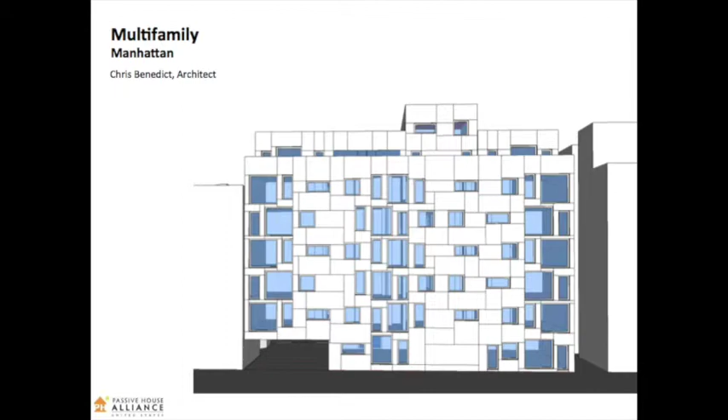At the Passive House Conference 2 years ago in Pittsburgh, Larry Swanson, who's the director of Action Housing, got up and said, it doesn't make sense for us not to do passive house because we have to hold the building for 15 years after we build it. And when we asked our architect to look at the math and figure out the effect of passive house savings versus built to code, we were about $1.5 million ahead on this one particular building, so it was crazy not to. And so Action Housing has been pushing for it.

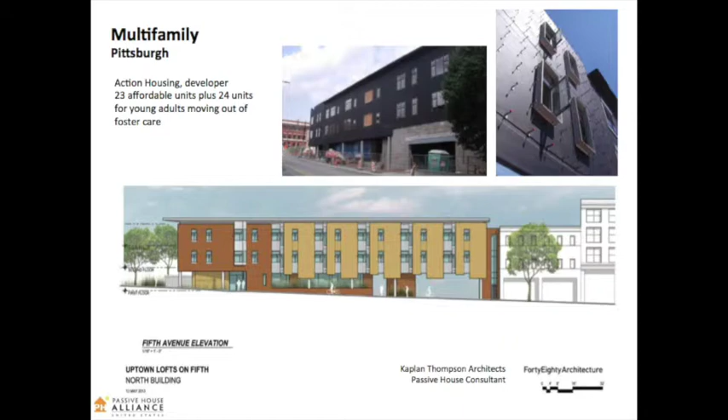And then as an architect doing this stuff, you look at these sort of things where you can imagine steel going up into the building and think, oh my God, there's just going to be thermal bridging to no end. They had these washers that you usually use, I think, for mounting mechanical equipment, resilient washers to use as thermal breaks. So anyway, all this stuff gets modeled. It's impressive.

Onion Flats in Philadelphia. These guys are amazing. Tim McDonald and a couple of his brothers started a company a while ago. They did design build, and then they bought a modular factory, and they make their own modules. They're also passive house consultants. They're just like one big thing, and they're doing more and more developments, multifamily.

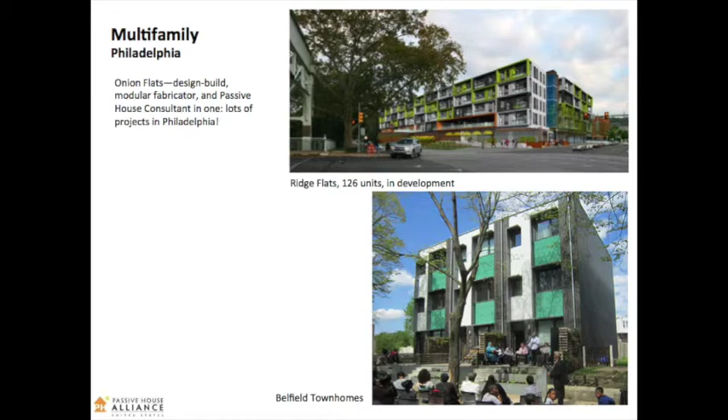We're seeing some townhouse units here, the Belfield townhomes that were completed a couple years ago as passive houses. This is Ridge Flats, 126 units in Philadelphia. Last week, Tim told me that they're working on getting the contract in line. So this hopefully will be underway here soon. It's a really impressive project. All their projects are, and it's just amazing the amount of work they're doing. I want to go to Philadelphia and take a little tour.

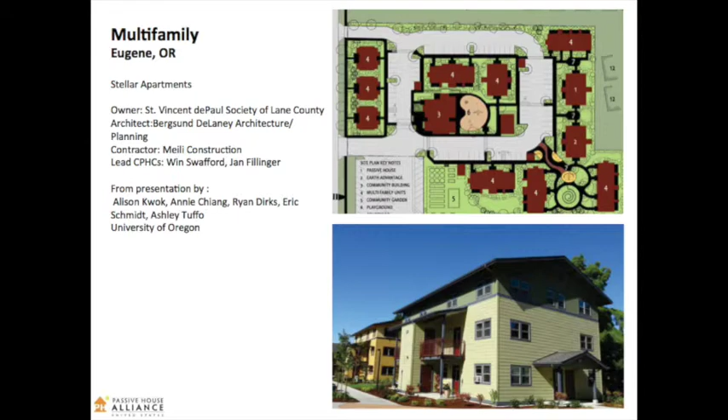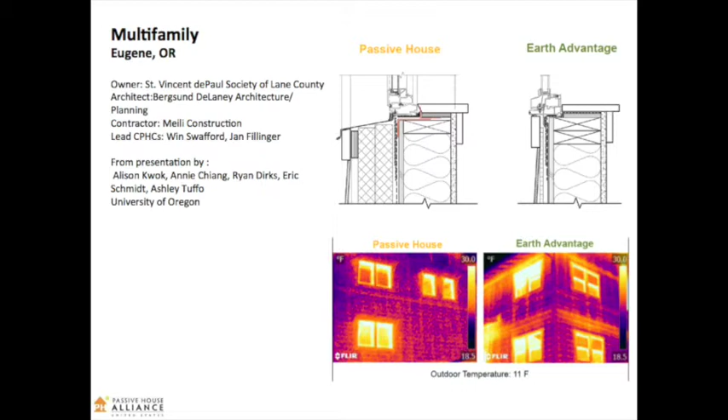So the point, though, it's interesting in this detail. You see with the rigid here, you're not only getting more insulation and continuous insulation, because the siding can be put on via furring strips, which are screwed to the studs, so you don't have to have anything solid where the siding is. You're also seeing a really distinct air tightness transition there to the windows. So these are the things that you just start to plug in and think about as you go to this next level of thermal rigor.

So what did they get? Well, the Earth Advantage was pretty good, but passive house is about 36% better in overall energy use. And when you look at the big blue pie changing from 41% down to 17%, that's heating. So that's the story with passive house everywhere. And the reason that happens is because we know that in cold climates, it's usually about 50% of our energy load. So that's the first big thing to take a crack at.

Interestingly, though, water heating is usually second, and here it turns out to be the case. So here we are at 22% on each of those. So that didn't change. Plug loads are relatively similar. That's people using TVs and blenders and whatever. And I think there's probably an ERV in here. Yeah. So you're wondering how much does it cost to run that ERV all year long? Well, it's 4% of your overall energy use. So you have ECM motors that are efficient, and it's not a huge drain.

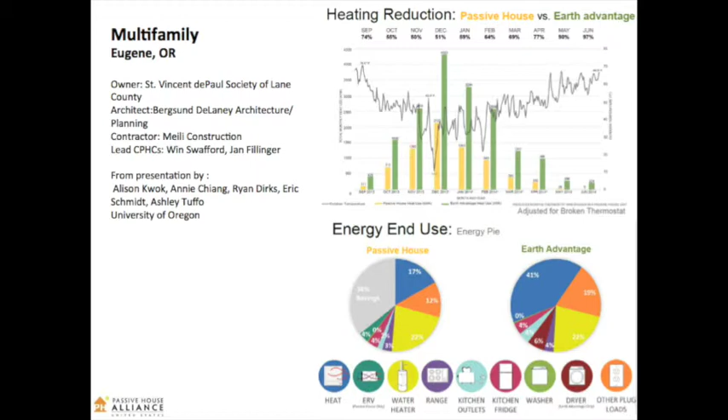And then you can see kind of as the temperature moves throughout the day or throughout the year, you're getting your big energy savings, yellow being passive house using less. So nice effective comparison there.

Well, you can do interior, you can do exterior. Interior is often problematic because you have walls coming in and hitting the exterior, so you've got thermal bridging there. And you have space constraints. I mean, the rooms are usually, in this era especially, not oversized, let's say. So an exterior retrofit, in this case, since you're going to have some moisture load building up on the inside, they decided to go with the vapor open enclosure.

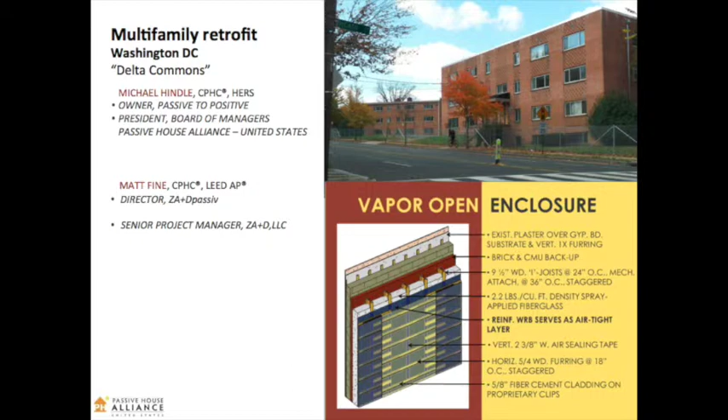So they're putting on some spray fiberglass over, with these sort of 9.5-inch I-joists as furring strips. And then a weather-resistant barrier serves as an airtight layer to the outside of that. And then you've got air sealing tape and then fiber cement cladding on top of that. So as is typical with passive house, you're going to have a continuous uninterrupted insulation and airtightness layer.

They actually had to interrupt it here, but they found it wasn't too big a ding on the energy, so it was fine. But yeah, like a parapet, that gets a little funky, right? You've got exterior rigid coming up and over. You got to figure out how you're going to frame this, how you're going to attach a coping, attach the roofing and the flashing, and make everything nice and sound.

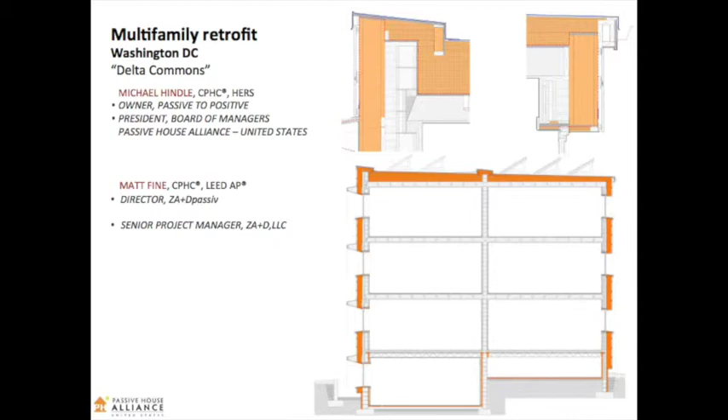So let's see if I have the slide of the windows. Yeah. So there were a number of challenges that they had to deal with here, like predetermined siting. You can't get these things ideally facing south or southeast like you'd like to. So they came up with different types of shading details that would work on the different orientations to optimize and shade at the right time, not shade at the wrong time, etc. And that's just fixed, built in.

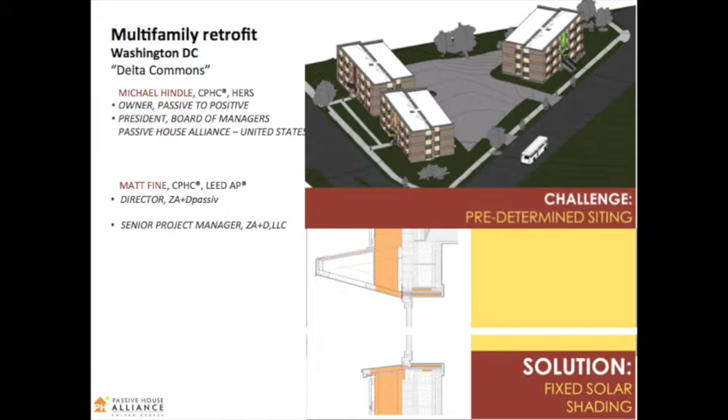So pretty fascinating retrofit. And again, it's very tuned to the climate and to the site, and that's the beauty of it. Okay, moving out west to Portland. This is a project that's just recently completed, the Kiln Apartments, and it's 19 units in an 18,000 square foot building with retail in the bottom. So great, I mean, biking neighborhood, all that kind of thing.

Somebody online has got access to a microphone and they're speaking. Yeah. So there we go. I think they quieted down.

Okay, we're going to spend a little more time on this project because it's got a lot of great details here.

And how are we doing on time? 6:40, good. Yeah, okay, good. So let's wrap this up in about 10 minutes.

Thank you to Dylan Lamar. Green Hammer is a company in Portland that does passive house consulting and I believe design build, do you know? Anyway, they are working as a passive house consultant on this project, which is a big one and is a big team. And that's part of the story of this, is how do you get a team on a big project building a passive house, because nobody's done this before, really.

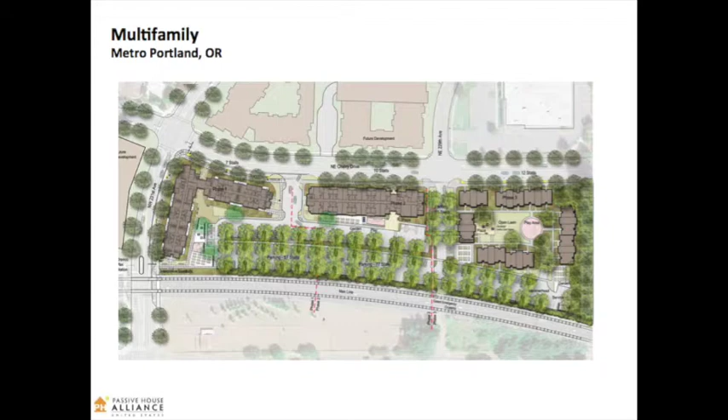So here's the site, and the building on the left here is the unit that's in construction right now, and the one that we're going to be looking at, and these other two are future phases. So this is Metro Portland. It's just kind of west of downtown a little ways. I'm not that familiar with the geography out there. I wish I was. Another place I want to go and look at passive houses, among other things, like the Gorge.

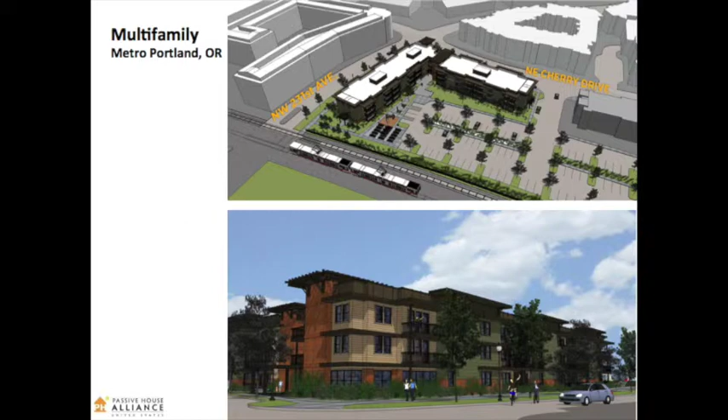So here's the building. We can see the shape of it. It's not like this passive solar thing where it's all spread out facing south. Passive house does not equal passive solar. You just need to calculate your energy, and you can see there's shading here, preventing overheating. This is what's happening with this kind of design that's exciting to me, is there's more interaction of building and environment in terms of both orientation and shading, and it's very, very site specific.

So these are some of the lessons from the team. I'm just kind of reading off from Dylan and his team. Basically, their big point was that the team needs to be integrated, and everybody has to be there from the very beginning. Even on a single-family house, it's very, very difficult if somebody who's not in the passive house world goes off and does some design and hands you a plan and says, "Here, can you passive house this?" Well, the answer is, maybe, but I wouldn't want to do it.

So owner, design team, construction team, everybody has to be fully committed. You're not going to force this down anybody's throat. And they were, because they knew the value of it.

The design charrette very early on has to get everybody there buying in, and you've got to establish the key concepts like, yes, there is going to be shading, or I don't know. You know how it is when you start to design a building, that you don't want to throw on a big factor later on that's going to affect energy and budget and all those things. And then in developing the design, there's a lot of iteration. Just like what we saw with those BEopt models, you're doing that with the energy model for this particular building.

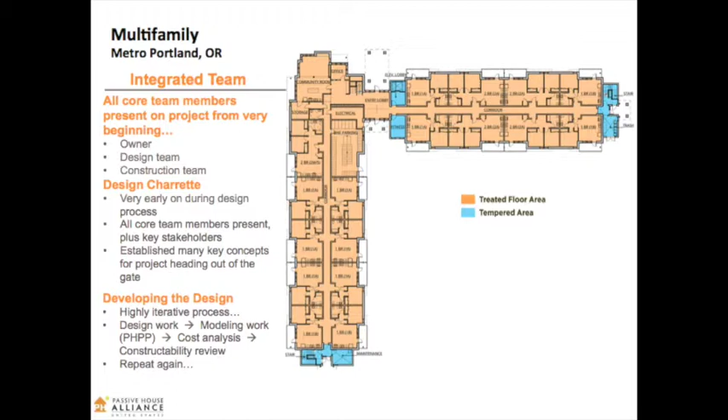So you do some design work, you do some modeling work in PHPP or WUFI Passive. You look at what that means for cost. You say, hey, maybe we should swap out this type of insulation for that, or these windows for those. Review its constructability. It's just a big team. And they had some pictures of the whole team sitting around the table. I didn't include those, but it really gets the point across.

Ultimately, this is what they wound up with: roof assembly of R81. And Portland is a milder climate than ours. And they did it with polyiso above trusses. So I assume that is because they wanted to run ducting and electrical and probably no plumbing up above, but in the trusses of the roof.

I'm doing a project right now where we're using trusses and we're just filling it with cellulose with a big air gap at the top for ventilation, because we don't want to do the foam if we don't have to. Foam's expensive, but we can't put any lights in there or ducts in there or anything in there because our airtight layer is on the bottom of the truss. For them, it's the structural decking at the top, so it makes it nice and easy. So yeah, exterior foam can make things kind of nice and easy.

Exterior walls at R39, they're doing it with some mineral fiber board outside of 2x10 framing with blown-in fiberglass. So that's kind of an interesting assembly. Wouldn't work in this climate. You've got to be careful because our temperatures at the outside of the 2x10, if that's your air barrier, are going to get really cold, and 1.5 inches of mineral fiber board insulation is not going to be enough to control condensation. So I will say that becoming a passive house consultant may make you much better aware of building science. So anyway, we want those bulletproof assemblies for your climate.

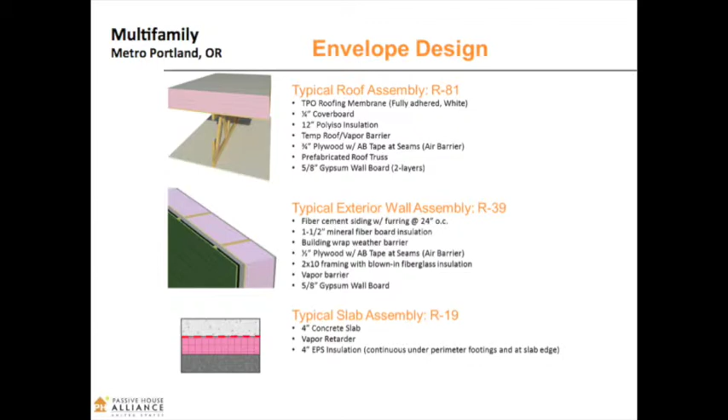Typical slab assembly, R19, just basically 4 inches of EPS underneath the slab, and then the plumbing and whatnot running down here. You'll see a lot of passive house architects, or these guys, GO Logic out in Maine, like to put 12 inches of sand and gravel in between slab and insulation to run the plumbing in there. So there's some different ways to skin that cat as well. There's a lot of different ways, actually, and that's why you get into these foundation coordination drawings, where you're iterating and saying, well, maybe if we take the radon barrier here, then how do we turn it up the wall? And there's a tremendous amount of this kind of thing.

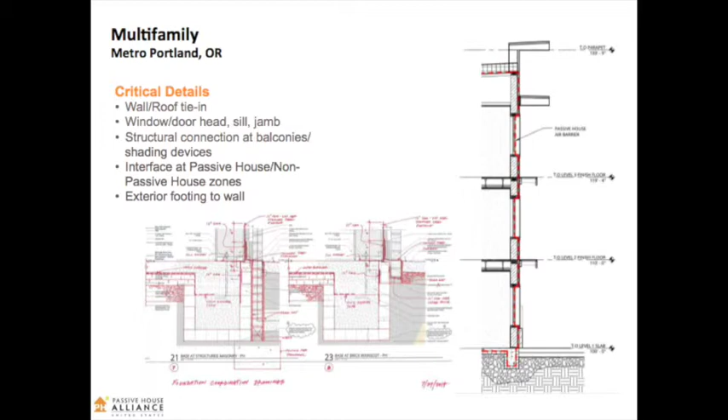Airtightness is the other thing, along with thermal bridging. I would say, as an architect, it's easy enough to think about how to make a wall airtight. Transitioning a wall to a foundation is always a little bit of a trick. Sometimes at floors, it's a little bit of a trick. It's always a trick here where you've got something that you want to just cantilever out and you can't, so you're going to have a ledger or an exterior structure. And then transitioning the air barrier at the roof is always a little bit of a trick. I think we've got a detail of that coming up here. And then windows, of course, you've got to seal those in. Critical details along the assembly.

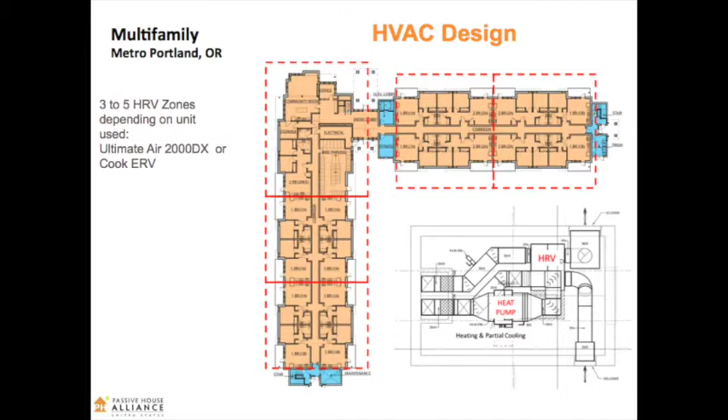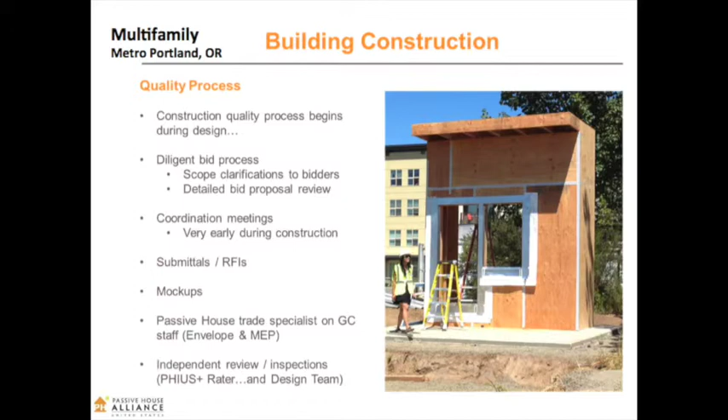So in construction, there was a lot of attention during bid to make sure that it's clear and that there's a tight review of the bids. Again, more coordination, the RFIs and the early construction meetings and the mock-ups, just like on any building, but on passive house, even more so, I would say, to make sure that these details really are going to be airtight, because if you got all these things installed and you run your final blower door and it's not airtight, you're not making it. And if everybody's counting on that badge, you better have it.

So here's some photos of in construction. You can see some geofoam. You know, this is the stuff they use under highways and bridges and stuff. That's a really, really dense EPS. You can put it underneath a footing, and so you don't have to do a deep footing. You can do a shallow footing if your climate allows with frost.

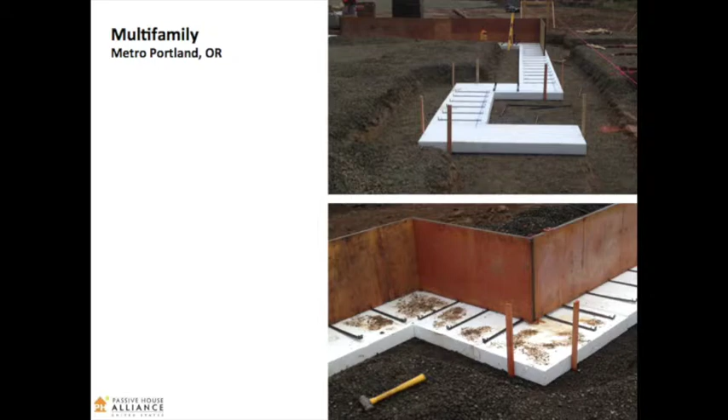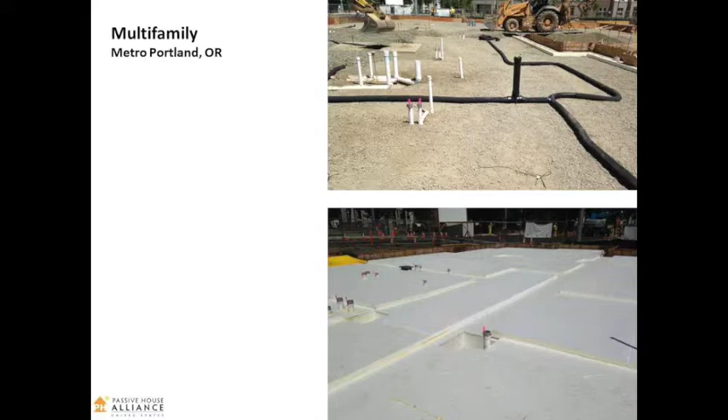And then once that's all formed up, this is under slab plumbing. I assume this is probably the radon release. And all that stuff, of course, has to be cut into the under slab foam. So again, we're not going to have a cold slab. There's going to be cold nothing in the winter. It's going to be nice and insulated around all sides, and all that insulation is going to touch. And then there's our radon barrier and capillary break.

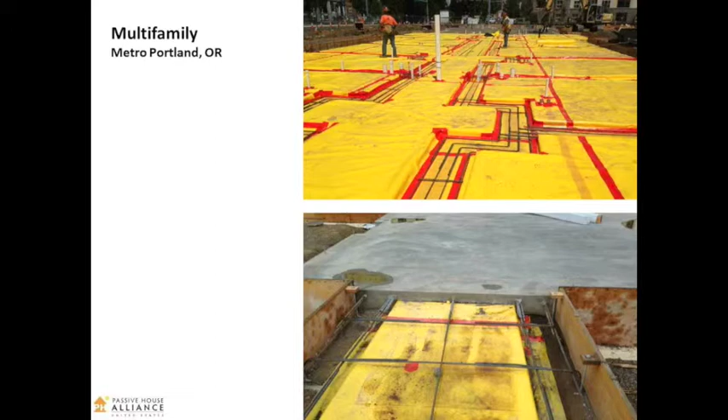Slab goes poured on top of that, and then we've got a beautiful thing to work on, lift our walls off of. Here you can see those big 2x10 walls going up with the sheathing. This sheathing becomes the air barrier then. And then typically this has one of two techniques, either a fluid applied air barrier like Henry or Tremco or Prosoco. Prosoco is Living Building Challenge certified. I should say Red List compliant, I guess is the right way.

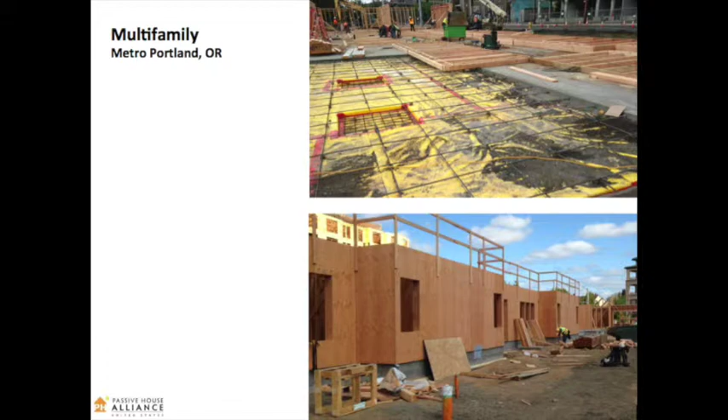And you put that on the seams, put it on the whole thing if you want it as an air barrier and weather resistant barrier. Or you can just tape the seams with like SIGA tape. They make a whole series of tapes for air tightness. I'm not sure what they're using here.